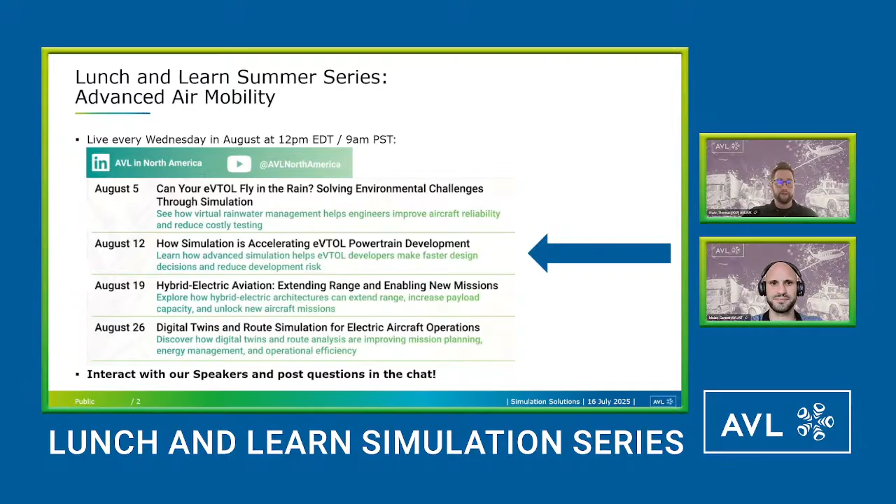Yeah, excellent. Super happy to have you today. And our topic today, as I already mentioned, is about eVTOLs and how simulation can accelerate the powertrain development. I want to start with a slide summarizing the challenges that the industry faces. This is from a presentation that was done by Horizon Aircraft at the recent Electrified Aircraft Symposium in Oshkosh.

It's really an interesting list of topics that they identified as challenges, and I highlighted in black the topics where simulation especially can help to solve the challenges and problems. So we have topics such as EV or hybrid electrification, the flight controls, the battery energy density and thermal runaway, the whole aircraft thermal, noise, reliability, and specifically about the battery we'll talk a lot today. And Gernot has some very interesting work that he can share coming up.

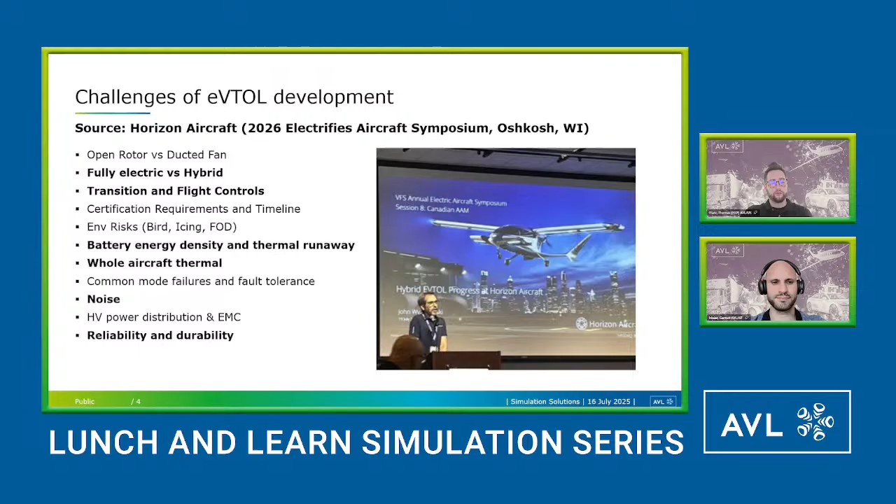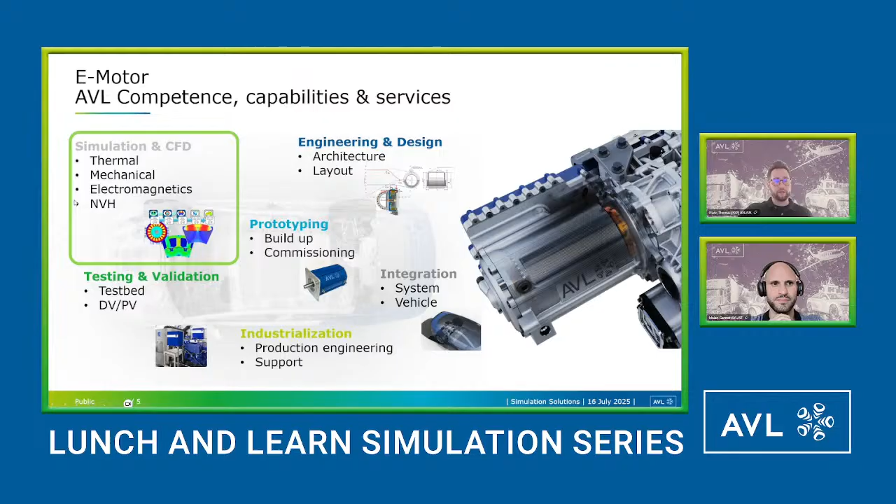But going a bit into the different topics. In terms of e-motor, AVL has long competence in capabilities and services that we offer for ground mobility, but also especially the aviation industry. Here simulation topics with regards to the e-motor in terms of thermal, mechanical, electromagnetics, or also noise, vibration, harshness are really long-running topics that we use.

And just to bring one example of how we use simulation in that space is AVL's e-motor tool, where we use a combination of 3 different simulation technologies, CFD, system simulation, and multi-body dynamics, in a combined workflow to very quickly get from some design sketches of an e-motor to a really detailed thermal analysis, and then potentially acoustics analysis, as well as a fast-running 1D system simulation model.

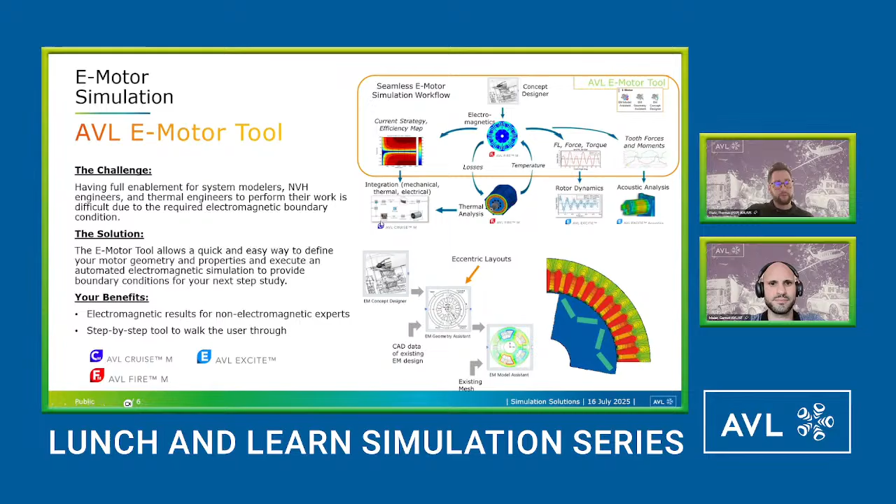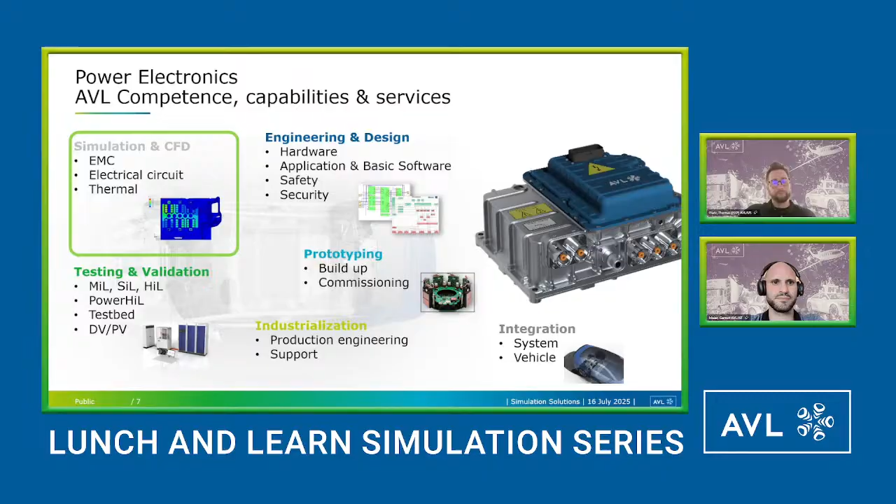Another very important topic, as mentioned by Horizon Aircraft, was the power electronics. Especially the thermal parts, the electrical circuits, and the EMC topics are areas where simulation can help development. And here I brought some examples of how we can help the developers. Here you see spreading of a grease or a thermal interface material for a chip, for example. This was done in AVL's Preon Lab. And this also allows them to do studies based on the performance of the thermal interface material.

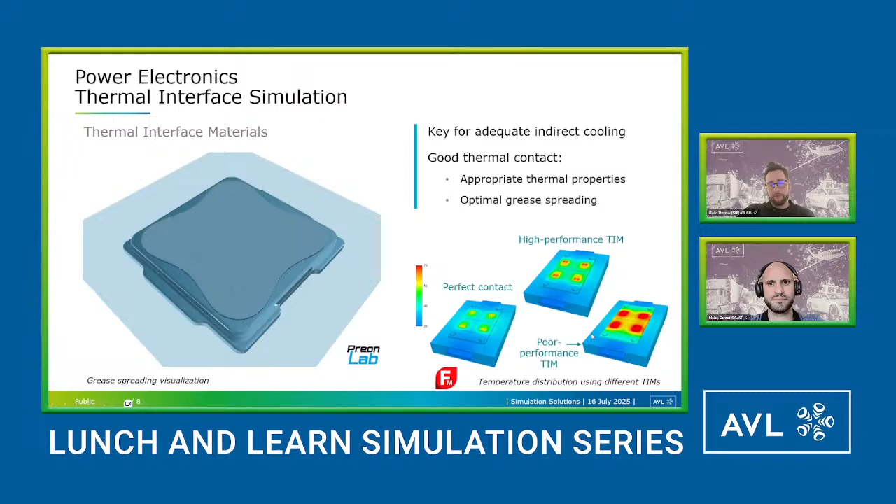So if you have great contact, or maybe there's a poor performance thermal interface material, what would be the difference in terms of temperature distribution? And this we do in traditional CFD, here as an example in AVL Fire M. And this really lays the groundwork for long-term reliability of these chips and power electronic components.

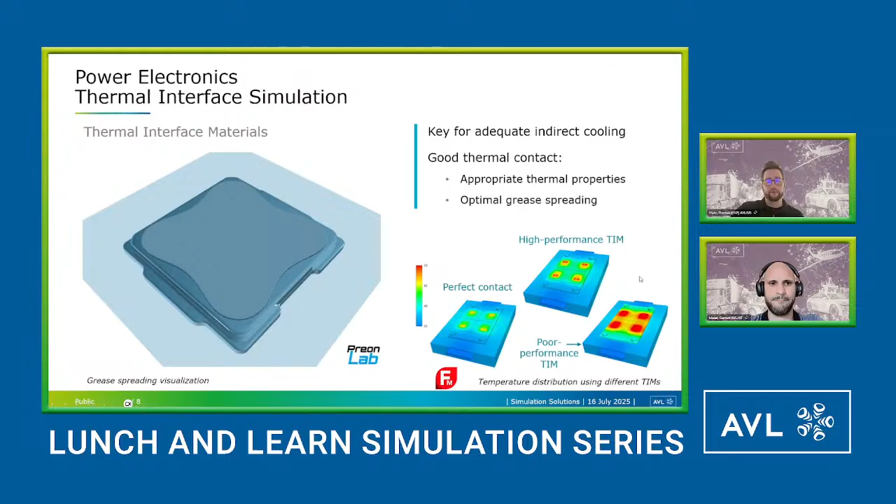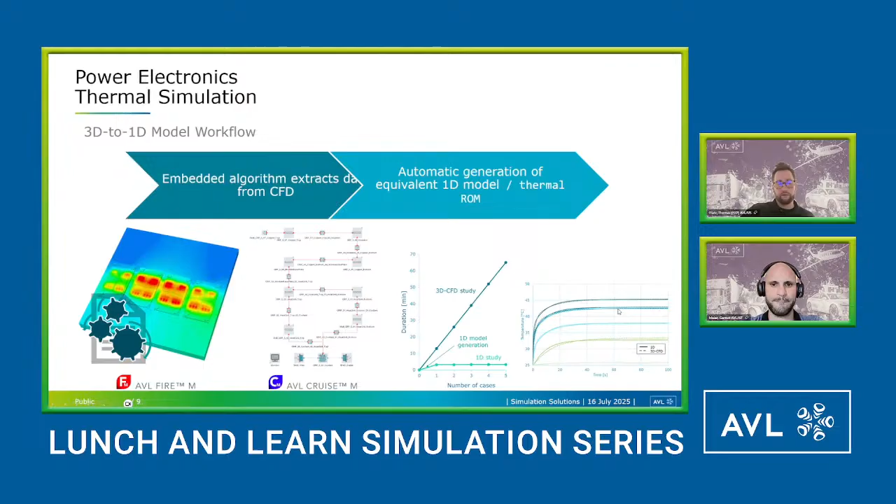And especially mentioning here a 3D to 1D modeling workflow. You see the very detailed CFD simulation in AVL Fire on the left side. But we also have multiple workflows in place to speed this up, to make reduced complexity models in system simulation, with the main goal to really get faster, maybe not as detailed, but to make quicker decisions. You see the amount of cases you can run with a 1D study compared to, for example, a 3D study. So both worlds are very important, and also how they talk to each other.

But then coming to, at least for me personally, the most important part of electrified aviation, the battery. Over the years, we had very good experience at AVL, not only simulating and providing simulation technology, but also actually putting it to use in our engineering. We designed and built the energy storage system of the Eviation Alice a couple of years ago. This was a battery cassette technology that we put in there.

So we did the design based on simulation work, but then also put it into the aircraft and tested it. And the plane had its official FAA experimental flight approved and successfully done in 2022. So quite a while ago, I would say.

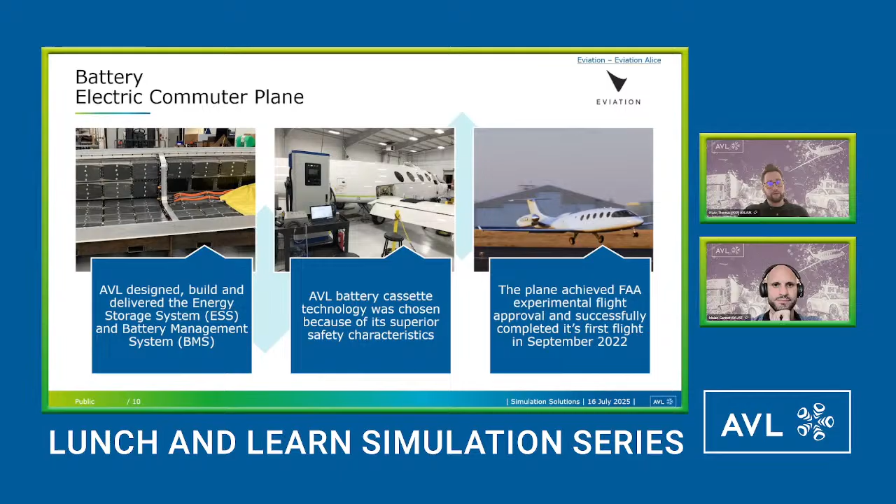The project, I think, commercially had some challenges, but the technology that we developed here, especially also on the simulation side, has since then lived on and got used by us in further projects, as well as by industry partners and customers. And this brings me to the next point, where I'm very delighted to share that Vertical Aerospace has used our technology for quite a while now.

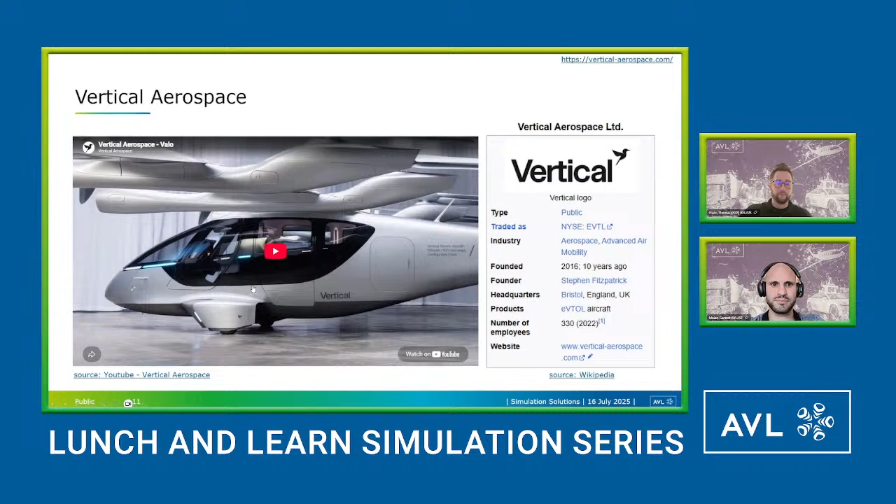Gernot might share more in the future, but especially you might be able to talk a bit more about Vertical. So we see here a bit of the information that's publicly available, so we are more than happy to share. What they do: they're based in the UK and developing really amazing passenger eVTOLs. I'll just play a quick video to give a better impression of what they do. So hopefully that works.

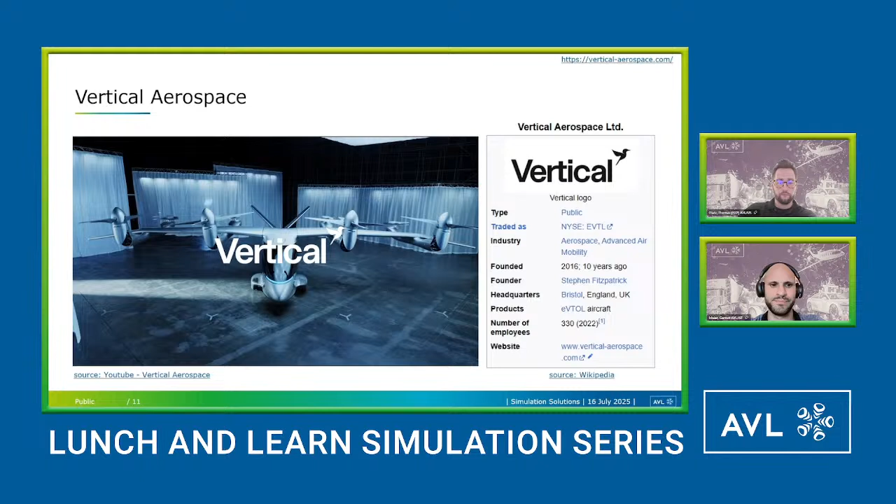Yeah, really amazing work that they do here. Amazing aircraft, and also amazing work that is done behind the scenes. And you can actually get more insight into their development process directly from Vertical Aerospace.

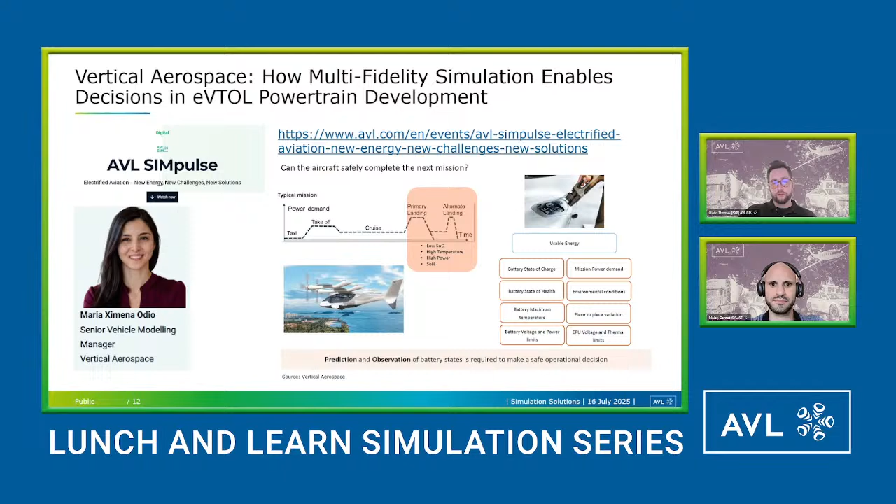But specifically in that aspect, we also picked a few aspects that we can share from our development, and also from some of the public work we did with them, and we can address especially battery design challenges upfront. In terms of selecting the right cells, weight is a big issue, and lifetime modeling for total cost of ownership. For example, we can use AVL Cruise M to create a model of the aircraft, make the cell decisions, and then do virtual cell comparisons.

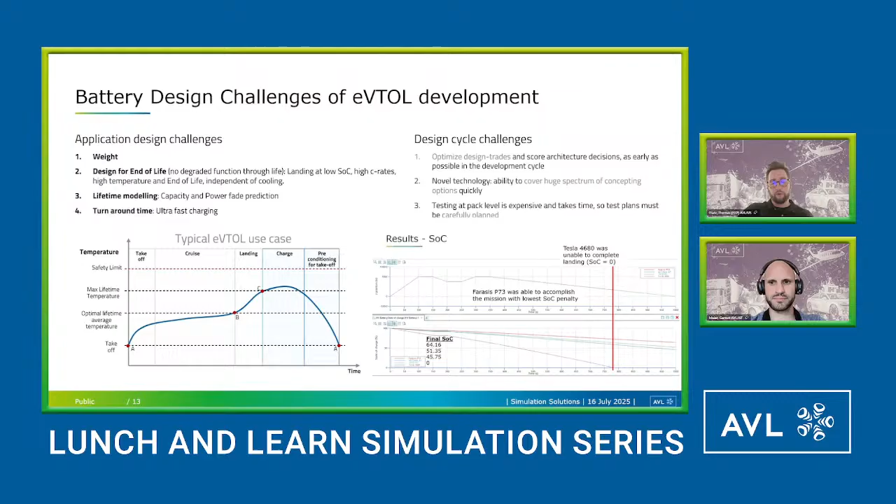So here's just one example with four different cells we ran on the same profile, and there are significant performance differences. Stuff like this is very helpful for the engineers to make their design decisions quickly. But even more importantly is the safety aspect. And Gernot is definitely an expert in thermal runaway simulation. Maybe you can explain to us a bit the challenges and applications of the safety simulations.

Yeah, Thomas, as you rightfully pointed out before, the battery is a huge topic of simulation, where I can do different things. And thermal runaway is a big thing; we will go into that on the next slide. But more generally speaking, there are a lot of topics you can cover using simulation that help you in your development process, either by shortening the development time or gaining insights that you wouldn't have even on the testbed. And also on different levels of integration.

Either on the system side, for example when developing a cooling concept and strategy that really takes the entire system into focus, or you can go down to the smallest level, setting up the single cell using an electrochemical model to observe things that you don't see on a testbed, like anode potentials that pretty much drive how the SEI layer grows. But also developing strategies for fast charging such that your anode potentials are always right, so your cell doesn't age faster than it needs to, and therefore also estimating the temperatures and power losses in your system.

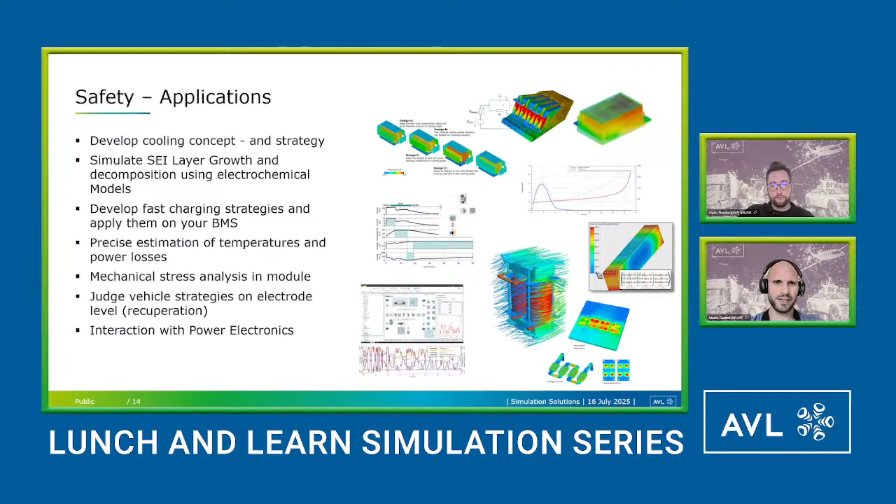And now if we focus more on the thermal runaway aspect. So yeah, thanks. Thermal runaway is a huge topic, or safety to be more general. And it's not only in aviation, but also automotive or wherever you're working with lithium-ion batteries with certain cell chemistries. There are a lot of different physical effects that we want to consider, ranging from cell level effects up to pack level effects. We just listed here the most important ones, starting from the cell level.

If a malfunction happens, the cell releases a lot of heat in a very short amount of time. And you want to make sure that this heat goes out in a controlled manner by picking the right thermal interface materials and potting compounds, such that you are not running the risk of a chain reaction, the thermal runaway affecting other battery cells.

What goes hand in hand with that is, of course, venting and ejection of particles inside the cells, flammability and combustion risk that comes from these usually flammable species that come out of that, potential for arcing due to the particles. So in this case, we're already on a module to pack level, more or less. But these are things you need to consider. And then also other effects like plastic parts melting and maybe providing new flow paths for the gas vent jets that you don't want to have.

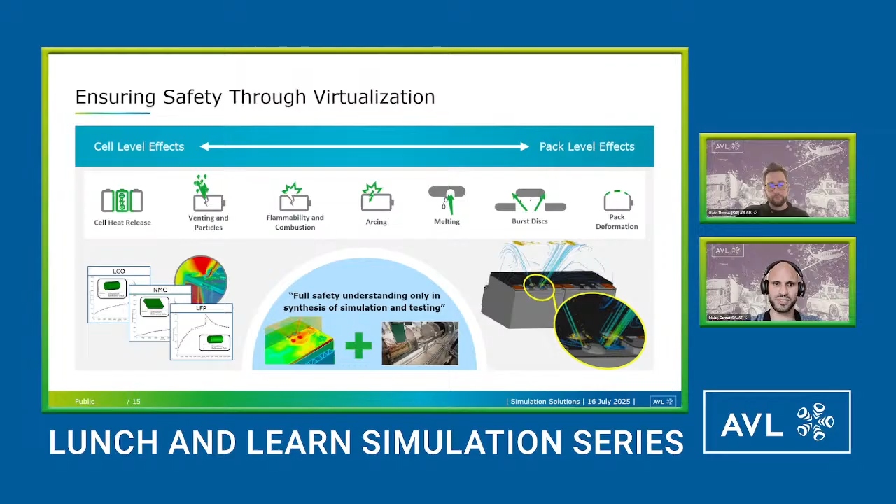And therefore, again, this point in the middle comes into play. You can do, let's say, a single cell test to get the characteristic of your battery cell, and then put that into a bigger unit and perform tests first virtually, and then you're even more informed. This is something we will see later on, and was confirmed also by Vertical. The simulation really also helps you to get a better understanding of how the tests should look. That's a very good point from your side. Yeah, excellent.

And I think to achieve this amount of different effects, we can put them to use in different simulation domains, or really different simulation technologies. At the foundation of everything we do in terms of thermal runaway and safety simulations, we use 3D CFD, FIRE M in this case. These are demanding simulations, no question. So they run on a high performance computer cluster or cloud nowadays, for hours, days, if not weeks for a large pack, according to the amount of detail, and provide you the highest accuracy.

So we are using this to really validate the design, and we want to get as close as possible to a real test with these simulations. But also we understand the engineering need for speed, and we need to find ways of getting to decisions faster. We therefore refer to system simulations, so 0D, 1D based approaches. This can go up to a coarse 3D level, as you might see here on the image. This runs much faster, maybe on a workstation or a powerful laptop in almost real time. Real time typically is the goal for this kind of simulation. Very useful for the concept phase.

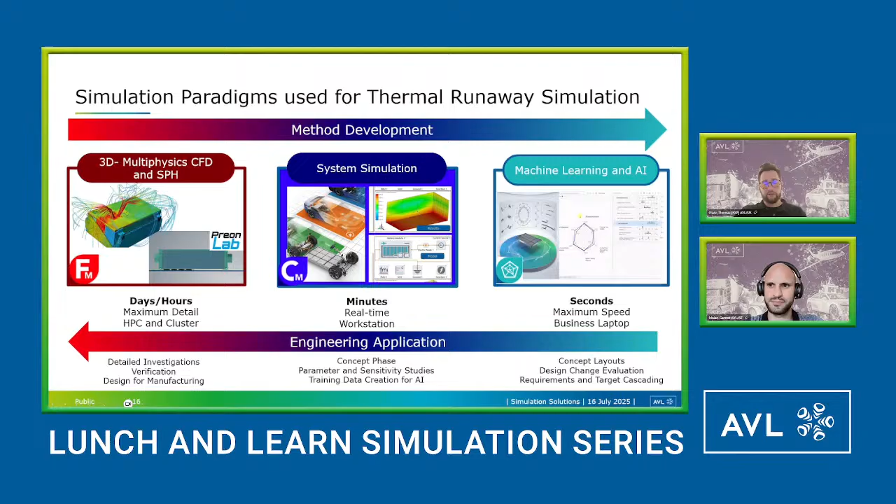From an engineering perspective, you work your way basically backwards. So in tool development, it's almost left to right. In the engineering application, pretty much right to left. And in the end, as I mentioned, CFD is the foundation. Again, can you walk us through a bit what domains are there? If we're, let's say, in this 3D CFD realm, as you mentioned before, we're looking really into all of the details.

In Cruise M, for example, we saw it in the last slide, you can do this kind of initial simulations, for example, for thermal runaway, but also for, let's say, your classical battery cooling application. You get results fast. You can cover the complexity of your geometry to a certain extent. But when it comes to assessing the performance of your already designed battery module pack, power electronics component or whatever, 3D CFD is always the way to get the most detailed insights.

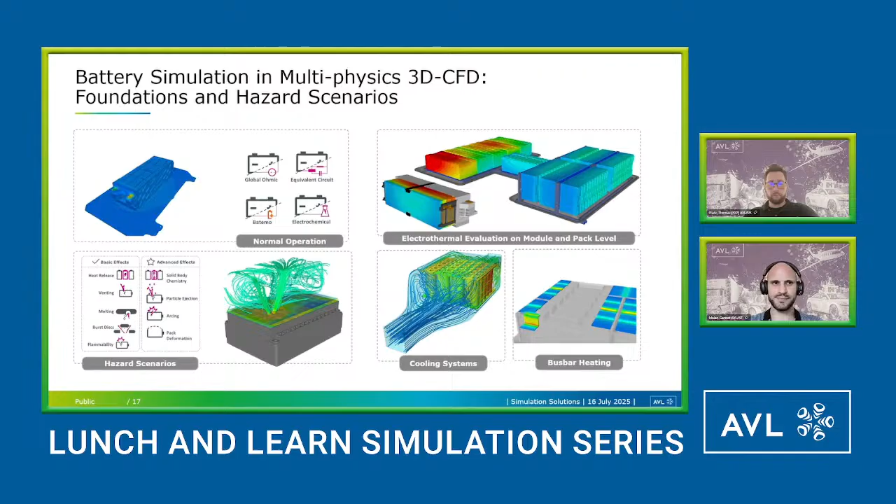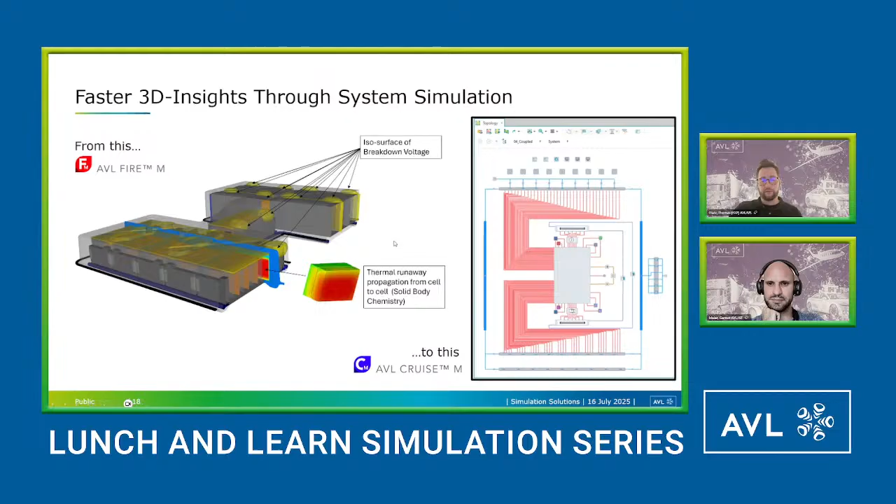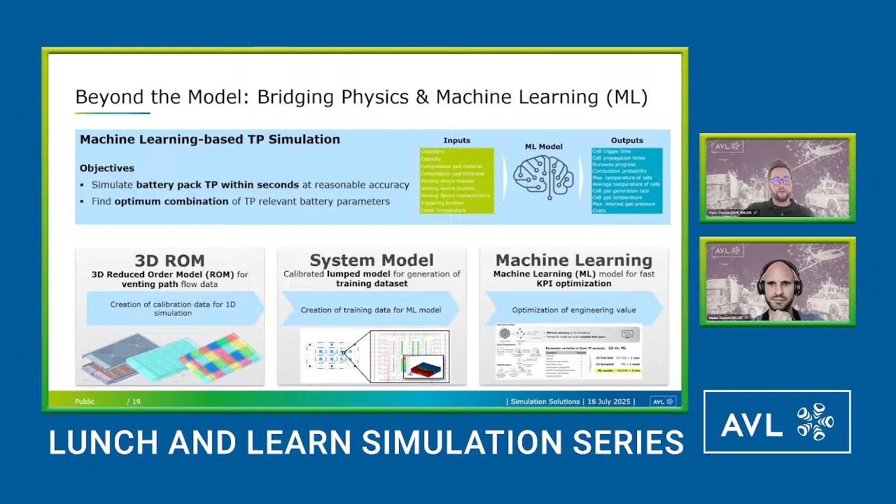And we would use this then, as I mentioned earlier, to train our machine learning models. And here you see also a very complex pack model that we used, and yet within seconds we screen the entire parameter space. But I'm speeding here a bit as we are a bit short on time, because I rather want to get to a real life application where this was already used. And Gernot, you were involved in this project and might be able to share a bit more.

Yeah, sure. Just a comment to the last slide. I also just want to emphasize that it's really a back and forth between the different simulation tools that we have.

So this is, I would really say, characteristic of how simulation is done nowadays. Sometimes it's necessary to have this detailed 3D CFD, which gives you a lot of insight but maybe takes a lot of time; therefore system simulation is faster. And we are always trying to use all the bits and pieces from one model and transfer it to another one. But anyway, we are happy to be able to give some insight into two use cases from our already quite long-standing collaboration with Vertical Aerospace.

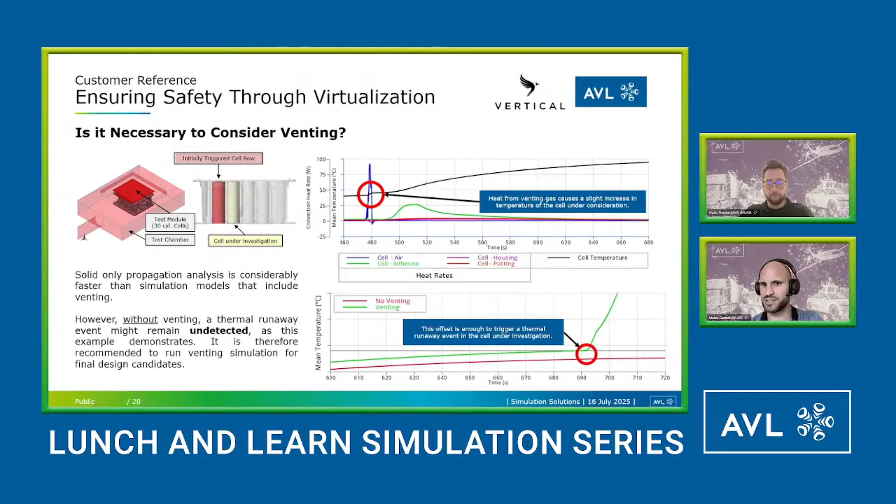And therefore, following up on the last slide, we want to use simpler simulation models, but at some point you always need to verify with more physics behind, because there are some edge cases where this could really make a difference. The second case, if you switch to the next slide, is of course always: can I trust my simulation model? Because there are always assumptions and simplifications in it. And this also always requires calibration. So if you don't know all the input, which you usually don't, like thermal contact resistance, information about how parts are touching each other, you will always need some kind of calibration.

And this is something we always need to mention, because sometimes you might assume, okay, I'm running a simulation and whatever comes out of that is just representing reality. No, you always need to be critical about that. And that's why, again, we have this topic of simulation in symbiosis with testing, because you need at some point to make sure my simulation model represents reality fairly well, and now I can continue with further tasks.

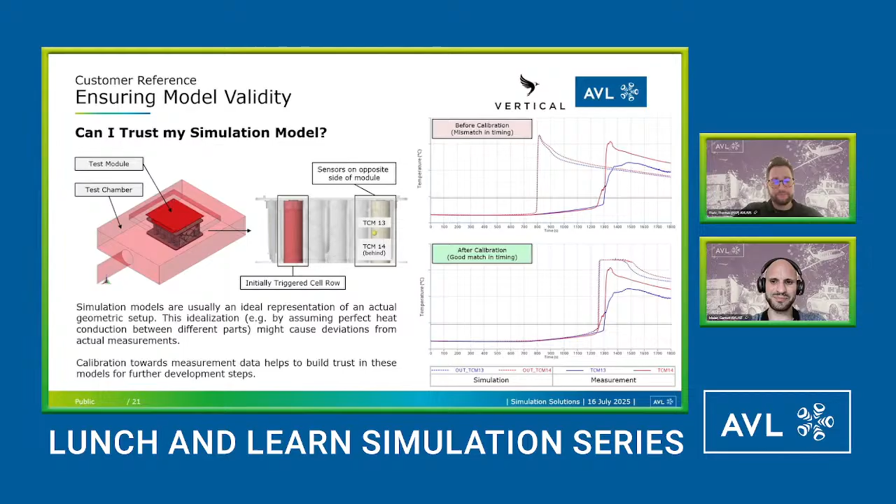And this was basically also confirmed by Maria Odio from Vertical Aerospace, who was really happy with that, because the simulation gave them a better understanding of the systems, the tests, different mechanisms, and so on. And it allowed them to make better decisions regarding the further engineering tasks they are facing. Yeah, perfect. I was about to say something, but I think I cannot finish with a better statement than that Maria gave us here.